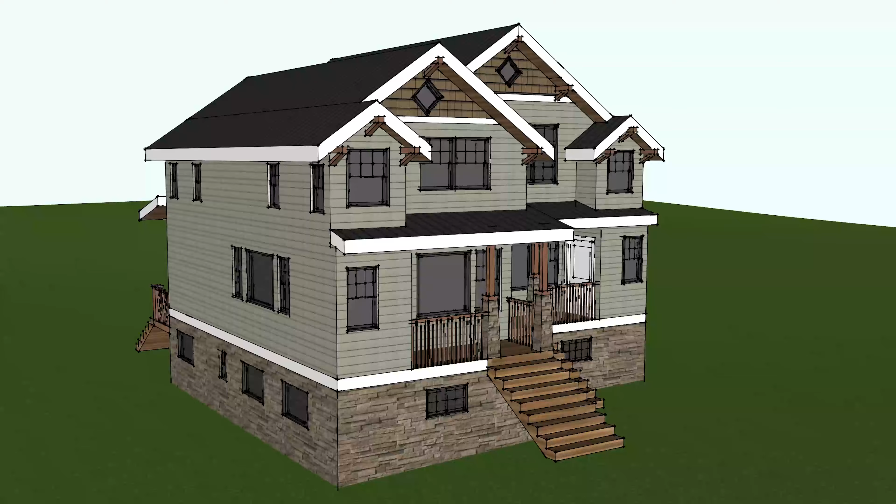Before we begin, I want to show you my final product. It's a 2-unit duplex that will be mirrored. It'll have 3 bedrooms, 3.5 bathrooms, and 3 floors.

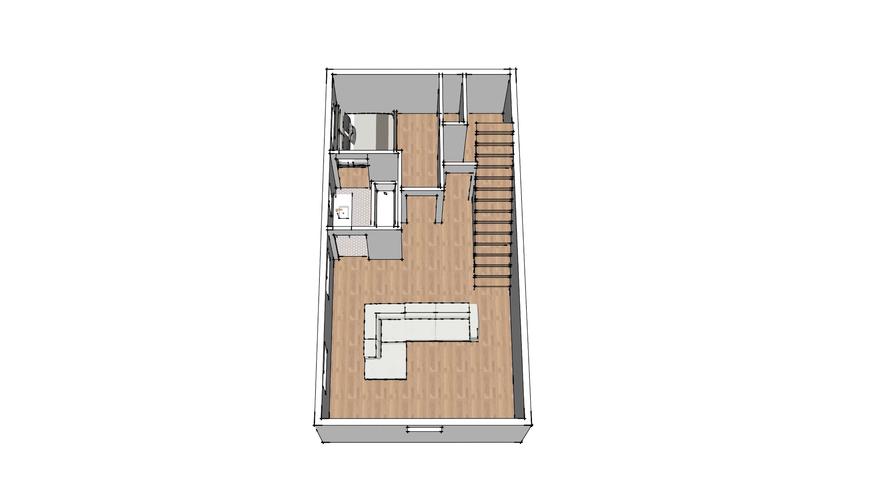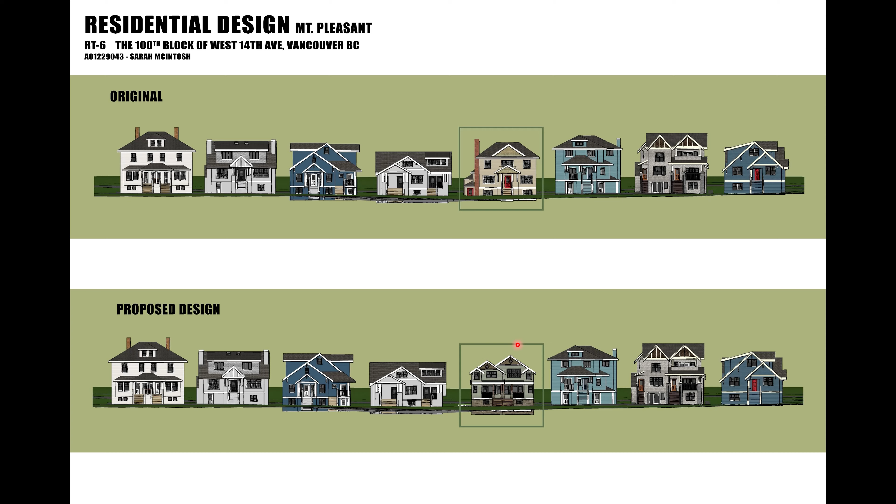For the max gross floor area, that's 4,575 square feet. With those numbers, I designed my home to have a total of 3,710 square feet, and if we split that right down the middle, we end up with 1,855 square feet for both units.

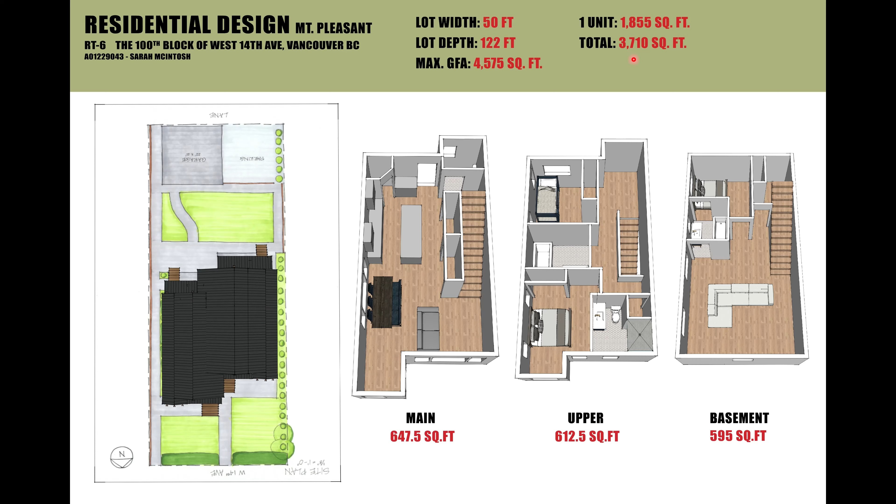I took a lot of design features from my neighborhood study. Since all the houses have elevated porches that were usually covered, I wanted to add that into my design to keep the street looking cohesive. Some houses had dormers or shed dormers, so later in my design process I decided to add those to my front facade.

Gable details really caught my attention. I knew I wanted to use these features because I think they give the house a bit of character, so I decided to add those brackets as well. Finally, I also wanted to incorporate some sort of decorative column.

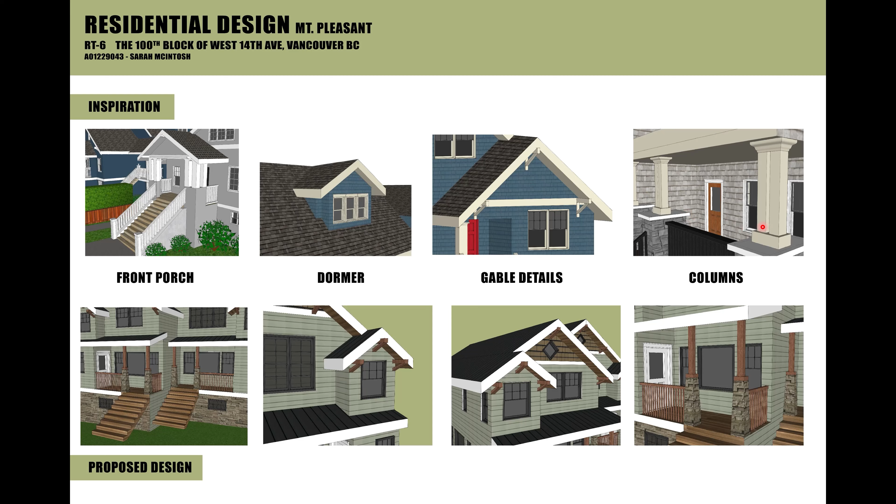Now we'll be talking about the site. In the site inventory, there were many things I wanted to keep and only a minimal amount I wanted to remove. The one thing I wanted to remove was this tree near the front window—it's quite close to the building and I want access to the backyard from both sides of the house. As for the smaller trees near the front, I would keep those so they still provide a privacy barrier between the neighboring properties.

Moving to the rear of the site, if you look at my new site plan on the right, I'm removing part of the garage so it becomes an open parking space, letting me add more greenery and fencing. I did have setbacks I needed to work with.

Going back to the project data, I was given a front yard setback of 23 feet, so I placed my house quite near there since I wanted more room in the rear yard, which was given a setback of 35 feet. For both side setbacks I was given a minimum of 5 feet, which I actually didn't use—I wanted to add greenery along the side of the building, so I ended up with a width of 6.5 feet for both sides.

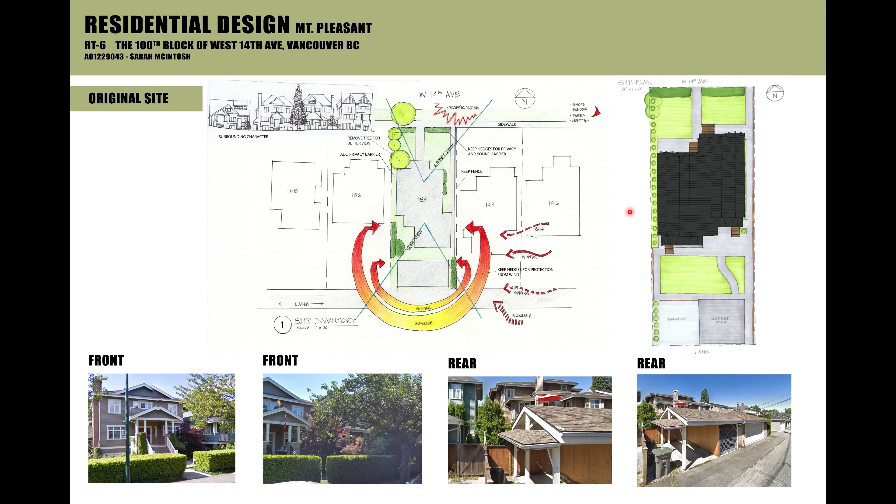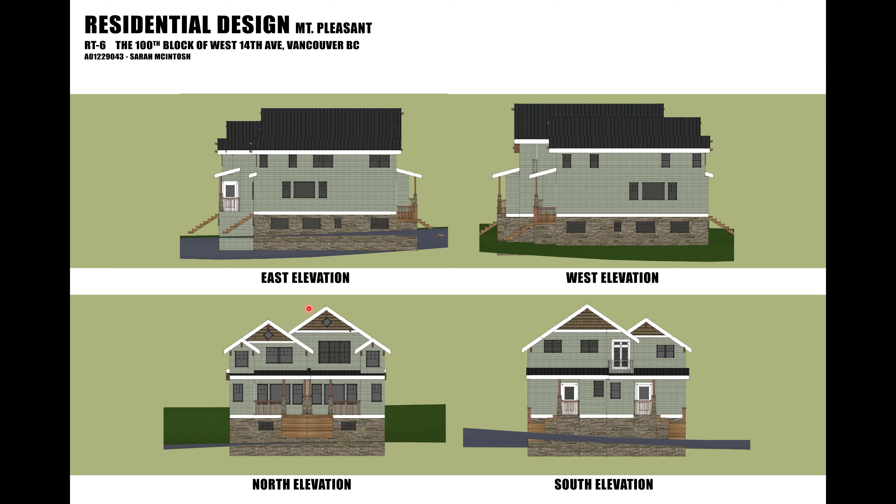Keeping with the exterior of the building, probably the most challenging part was deciding where to place the most important rooms. Since there's a wall separating both units, I had to really brainstorm where to place the kitchen, the living room, the bedroom, since lighting is such a big factor. I can show you how I placed those rooms if we move on to the interior.

So I have a porch entry that leads into a foyer. This foyer leads into the living room and dining room, and as you can see, it's a very open concept interior. I didn't want too many rooms separated by walls because I didn't want the units to feel too small. So we have a very spacious kitchen and a pantry that provides storage. We also have backyard access, a bathroom, access to the basement, and also the upper floor.

For the upper floor, we have one bedroom, a bathroom, a master bedroom with an ensuite, and a laundry room. I wanted to put the laundry room on the same floor as the bedrooms because I think it's very practical instead of having to walk up flights of stairs every time, which I don't enjoy.

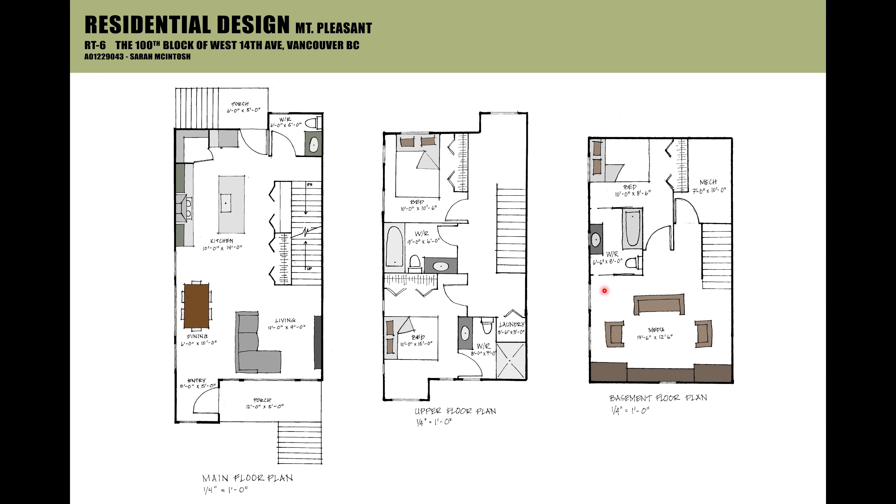Now, moving on to the basement, we have a large media room, or a room for anything really. We have a mechanical room, a bedroom, and a shared bathroom with pocket doors to save space.

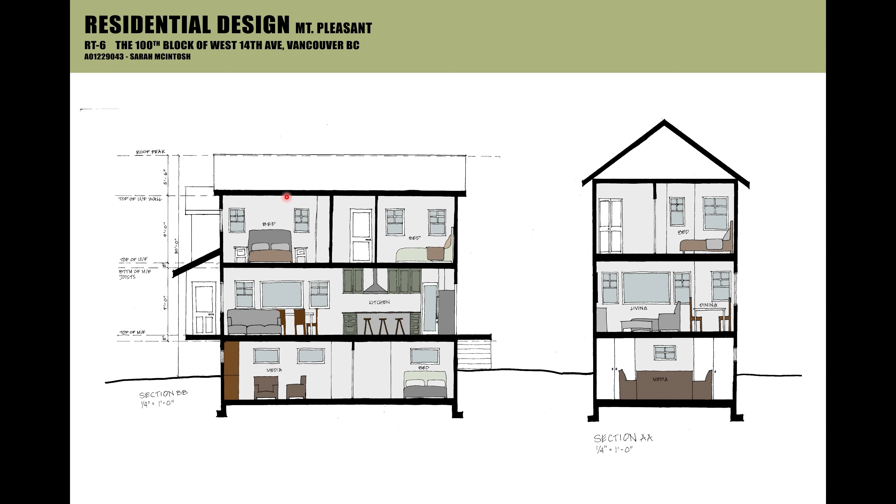For the building sections, it's fairly simple. I chose this location to cut through the building because all the windows are located on the exterior side of the unit, and you can also see how narrow the unit is. For the ceiling height, I went with 9 feet for both the main floor and upper floor, and 8 feet for the basement.